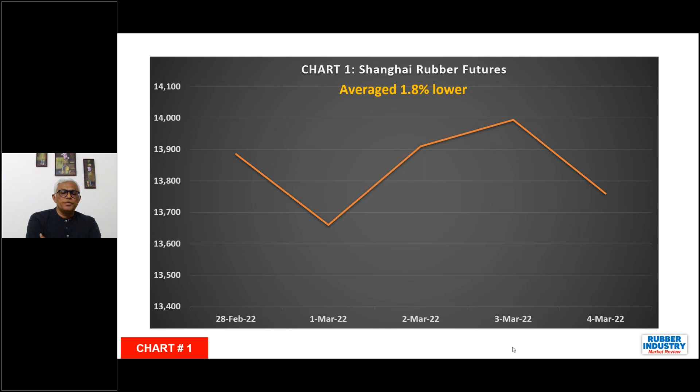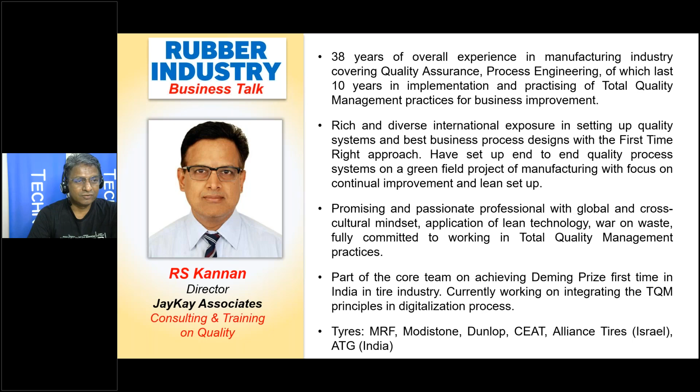He was also part of the core team that achieved the Deming Prize for the first time in India in the tire industry. He's currently working on integrating TQM principles into the digitalization process, and has experience with MRF, Modistone, Dunlop, CEAT, Alliance Tires, and ATG. So Mr. Kannan is well experienced in quality, and he'll be giving a talk on the role of quality assurance in the rubber industry for business excellence.

This will be a little longer session, so I want all of you to follow along. This is a very important topic for all rubber industries - quality, quality, quality. We talked about this in today's session with Mr. Saga Elastomer, the emphasis on quality, and looked at problems related to impurities. So let's now look at this subject of the role of quality assurance in the rubber industry for business excellence.

Welcome to Rubber Industry Business Talk, organized by Technobase. This is a Technobase event. Today we are going to discuss the role of quality assurance in the rubber industry for business excellence. I'm Kannan, Director of JayKay Associates, basically into consulting and training on quality.

When we say role of quality assurance in the rubber industry, generally people think that quality assurance is something very critical in a manufacturing setup. But my experience in the rubber and tire industry for nearly four decades has shown me a very clear indication that quality is there across the board, whether in any particular industry or even in service industry. So we are going to see how it influences the rubber industry as well.

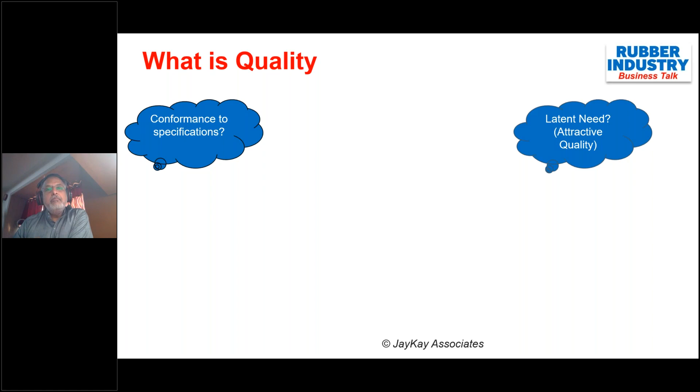So this is attractive quality. This is not one which the customer has asked for. This is a latent need. So seeing the customer going through some trouble or difficulty, you come out with your own perception of mitigating the problem, and that is called attractive quality.

Next, we are talking about ISO, that is International Organization for Standardization, which is the mother of all the standards across the globe. So what does that say? It is the ability of a set of inherent characteristics of a product, system, or process to fulfill requirements of customers and other interested parties. So is this the quality?

Next, fitness for use. There was one Mr. Juran, a quality guru who transformed Japan post World War II from a completely devastated economy to a very high level quality accepted and benchmark quality country in the whole world. He says that quality is fitness for use, which includes the issues of reliability, availability, and maintainability. So is this the quality?

We also say value for money. Now, I am a person who is actually feeling hungry and want to eat something, but I don't have more than say $10 in my pocket. So how do I do it? I can go to any nearby shop where I can take a pizza, a small burger or something like that, and satisfy my appetite with that small sum of money I have. If I have a big purse, then I can go to any proper good restaurant and splurge on having a very sumptuous lunch or dinner.

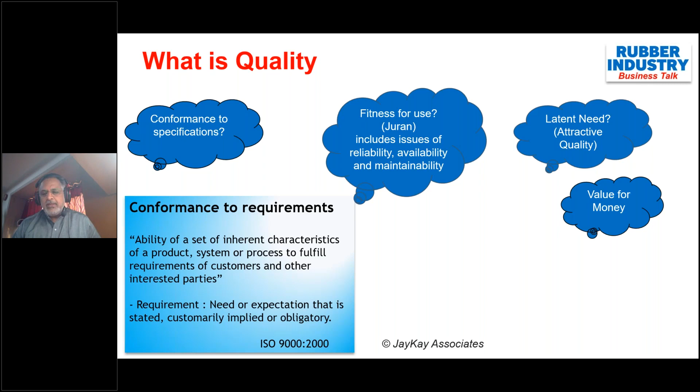So these are some of the top of the mind thoughts which come up if I have to define quality. So basically, we look at quality as a totality of features and characteristics of a product or service that bear on its ability to satisfy given needs. So now, when I have to sum up everything, what is quality? Then it is a combination of all.

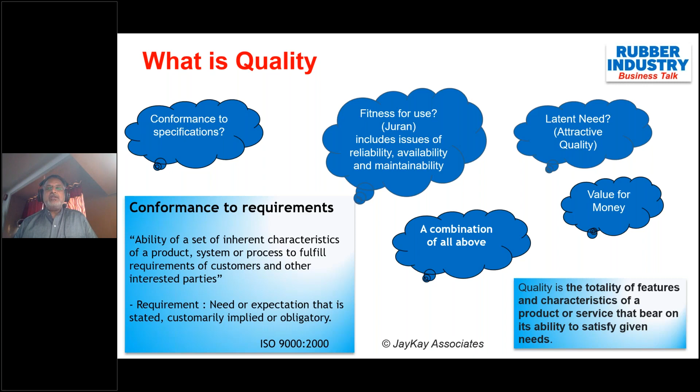So whatever we described, and there may be much more than this also. Basically, we are talking about meeting a specification, meeting a customer demand, thinking about attractive quality, latent need. We are talking about value for money, and then fitness for use, which is functional characteristics, talking about reliability, availability, and maintainability.

Now, having seen what is quality, why we need quality, what if I don't have quality, what happens? Quality is basically needed because if I want good repetitive customers coming to my doorstep, I need good quality. If the quality is not there, people nowadays don't even look at the company or the product or the service that we are offering. So good quality will make for happy customers.

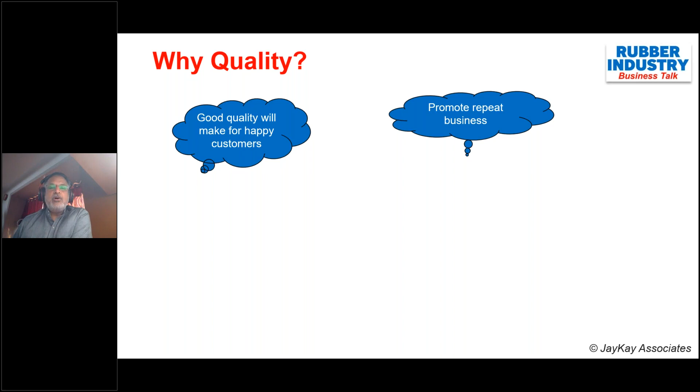Next, why we need quality? To promote repeat business. More and more new people coming also grows the business, but more important is existing customers should come back to me again and again, so that I have a repeat promotion of my existing business. So that is why I need quality.

Why do I need quality? It enhances productivity. How can quality enhance productivity? Basically what we are saying is, when the quality is very good, of a very high level, it reduces our rejections. It brings in better conformity to the variations and stable and capable processes. When this happens, automatically my rejections go down, my rework goes down, my scrap goes down. And when rework, rejection and scrap go down, it increases the output and thereby increases productivity. That is how good quality is related to higher productivity.

When higher productivity happens, then we are in a position to sell that much more to the market, and this increases the sales. So when the sales go up, automatically the profits also go up, leading to higher profit. When all these things are happening, my business is on a promotion mode, an enhancement mode, so automatically the development and growth of the business happens. When this is happening, the employees involved in the system are assured of their job for continuity and perpetuity, and this increases job security for them.

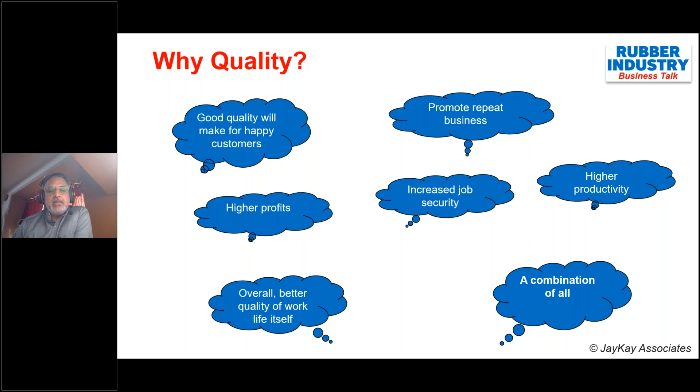Then what is it? Overall, better quality means life itself becomes comfortable. When the quality is good, your rejections are less, your fatigue and muri comes down. Automatically it increases your morale, and that's how you become a happy person internally while doing the job. So is any one of these the reason for why we should have quality? Not at all. This is again some of the few thoughts; there are these and many more which constitute the reason why we need good quality.

Again, there's a distinct difference between the perception and mindset of the customer. Customers in the early 70s, 80s, 90s, even up to the 2000s, were only worried about a product with good quality, and they were not worried about delivery or cost, because we still remember that when Maruti came into the country, when Hero Honda came into the country, we used to book a vehicle and wait 4 or 5 years to get delivery of the product at whatever cost they were telling us, because it was a supplier's market, completely controlled by the sellers. So as a customer, we had to wait and endure the time till availability was made to us.

But today, with the world opening up, economy opening up, businesses growing, there is no such situation. Today's customer says that I need completely good quality. There is no question of settling for second grade quality, and that highest quality has to come at the lowest cost and at the fastest delivery speed. So he wants a complete paradigm shift not only in quality, but also in cost as well as delivery. That is today's customer. And if you have to meet the customer's demand, then we need to enhance and ensure that our quality is always at the top level.

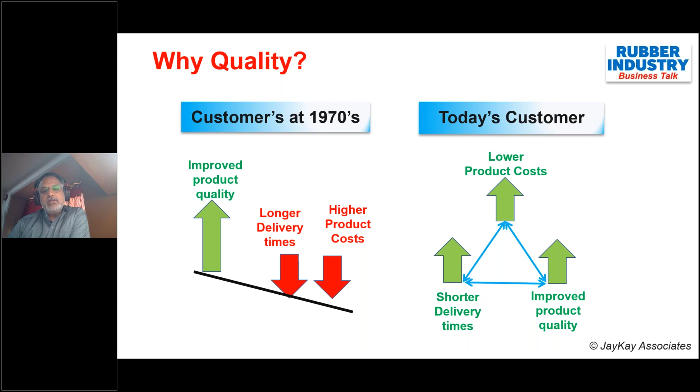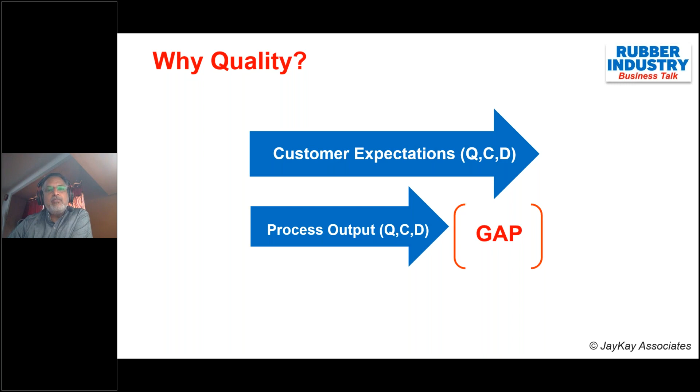When we say why quality, the customer expectations on quality, cost and delivery are given by the first arrow, whereas the process output currently is the second arrow. There is a big gap, and this gap happens because of so many reasons. We need to understand that in reality we are not really meeting customer expectations to the levels of QCD. So what is the gap, why is the gap, and what do we need to do to fill it? Let us understand why this gap is coming.

This gap is essentially coming because of variation. Variation is inevitable in any process, but we are not talking about eliminating variation, only minimizing it as much as possible so that the process becomes completely predictable and completely capable. When we bring in these two aspects into the process, we say our variations are at the lowest level, rather than high and completely unpredictable. You are able to predict and minimize the variation, thereby ensuring your product meets a definite standard of quality, much ahead of what the customer expects.

Now, when we talk about variation, we use the word process. What is a process? A process is nothing but converting an input into an output using a set of interrelated activities, primarily using resources like the 4Ms: man, machine, material, method, to achieve a desired output, inherently ensuring that we meet with effectiveness and efficiency.

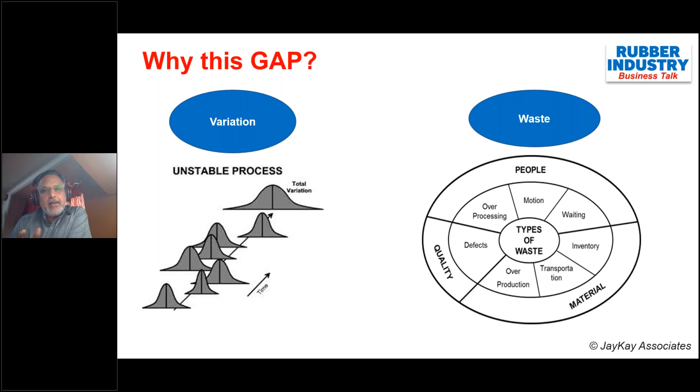The other reason the gap is coming is because of waste. When variations are high, conformity to requirements is low, and as conformity goes low, non-conformity becomes high, leading to waste. When there is waste generation in the process, it leads to rework, repair, scrap, or waste as such, and this hits both quality and productivity. Generally, waste can come from all three fronts: people, quality, and material.

So how do we look at waste? There is an acronym called TIMWOOD, which talks about the 7 types of waste. Transportation is one definite waste which we can control, identify and minimize. Inventory is another waste, where we don't have to keep storing more work-in-process material across the width. And M stands for movement or motion - when people working in a particular area move frequently left, right, up, down to fetch material to support their process, this is again a waste of time.

Waiting for the product to come, for intermediate work-in-process material to arrive, is again a waste. Overproduction and over-processing - meaning more time taken for processing or more numbers produced than needed - are both considered waste. And finally, D, the defect, which is again a direct waste in the system.

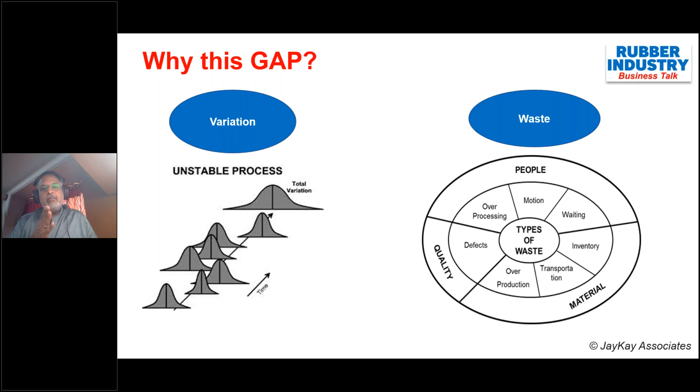So when you have huge variation in the process coupled with great waste being generated, this is sure to impact the output flow. This gap has to be completely minimized and brought as close to zero as possible, if we want to improve the perception of our product from the customer's view on QCD.

There are 4 levels of evolution of quality. As in the pre-World War II era, quality used to be predominantly inspection. So what is an inspection? Even if you see in the actual rubber industry, where rubber is taken from trees and converted into sheets and graded, it is done only on an inspection basis.

There is a standard reference given, and grading starts with RSS 1, 2, 3, 4, 5. You look at the color, the texture, compare with the given standard to see if it meets the requirement, and accordingly grade it as 1, 2, 3, 4, 5. This is the basic method of quality - when nothing is there to define what is right and wrong, you have a standard sample, and looking at the sample, you make a go/no-go or pass/fail classification, which is called inspection. This is mostly done on the final product.

If you talk about a rubber sheet, we take the latex, process it, and convert it into a rubber sheet, dry it. Post drying, when the sheet is ready, we do the sorting and classification of go no go, and then grade it from RSS 1 to RSS 5.

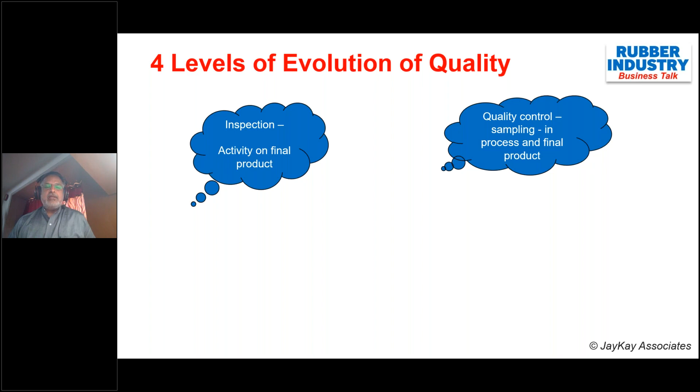Then the second stage came as quality control. Whatever we were doing at the final stage, we tried to bring into the intermediate stages, putting some kind of control aspect on the process to decide whether we can minimize and improve the rejections at the final end.

It did definitely make a big improvement, but not the improvement we are looking for, because eventually if I originally had 50% okay and 50% wrong, now it must have come to 75% okay and 25% wrong. Yet 25% is still a big rejection.

That is why both these levels of quality are called reactive, because you don't have any proactive control. You are only looking at either a finished product or an intermediate product which is developed, and then you are rejecting it. Then came the third level, with changes of time and changes in customer expectation.

We needed to go from a reactive mode to a proactive mode, and then we came out with what is called quality assurance. So when quality assurance came, the processes were getting defined, the quality system was getting defined, and the approach was based on the process approach, which is PDCA: plan, do, check and act.

Every process we do was seen from a customer angle. So everything became customer-centric, the customer became the focal point. And last but not least, it was based on continual improvement.

We will see what continual improvement is as we go down the journey, but these are the three main characteristics of the quality assurance principle, where you have to ensure a system is in place along with the process approach.

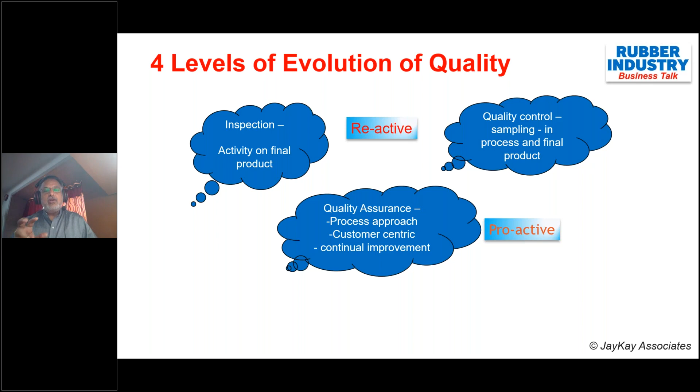So everywhere we need to ensure processes are put in place where the impact of other resources like man, machine, material, method has very little influence, and the processes take care of the entire ecosystem. That is called total quality management, which starts from end-to-end process, people, process, and customer.

So when I say people, it is hiring to firing of people. When I say process and manufacturing related activity, if it is sales, from taking a customer order to ensuring follow-up with customer service is completely in place.

When you talk about the material function, it's about identification and selection of a vendor, development of the vendor, continuously handholding him, and ensuring we become a vendor partner. So in every aspect of the processes and sub-processes, we need to ensure end-to-end quality is given high focus.

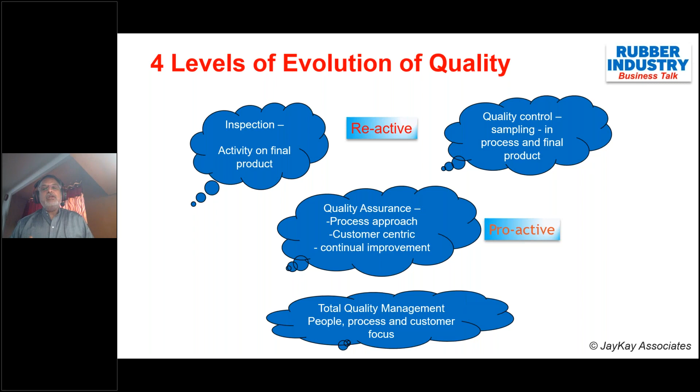Now generally, whenever this kind of situation happens, like we encounter a rejection or a process abnormality, there are two ways of reaction.

One is, you can be a proactive person, you can be a reactive person, but generally the mindset of people, or even the ecosystem, is made in such a way that we are more on a reactive process. But it is consciously made and cultivated that we need to move from a reactive to proactive process in order to win over it, over a long period of time and in a sustained way.

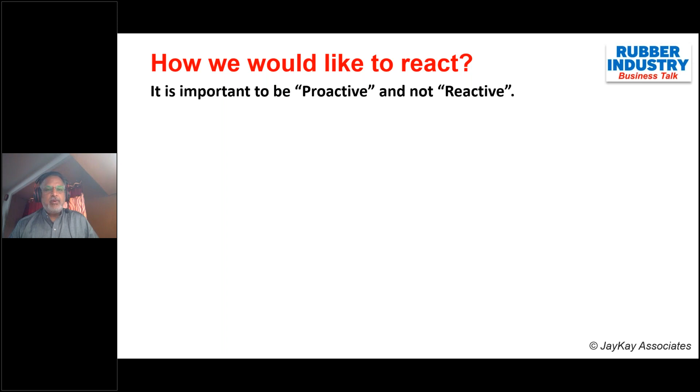So when we say this reactive to proactive, what happens? Changes are likely to happen all around us in the environment at all times, and every change brings in a new behavior. So when changes are happening around, like COVID is a change recently we had, how you make your mindset and develop processes around you to handle this is actually what makes you a person to think in a proactive way or in a reactive way. You can always lie low, cribbing, crying, but that's not going to help us in any way.

So there are three types of setups. One is a common man implementer, one is the blockers or high resistance to change kind of people, and the other one is the leaders who set a new path for the next generation to follow.

So how do these people differ? The common man implementer always thinks, when there is a change happening around creating impact, he says we'll wait and watch. We will not do any hasty action anywhere, let's wait and watch. So it not only consumes time, it also creates an impact on our working process in the form of business excellence, output, or profitability.

Next, there's little anxiety, then some reactive state. I'm not really going into finding what exactly went wrong or how I can defeat it or overcome it, that kind of thought process is not given. I straight away jump into a reactive process with anxiety, and because of anxiousness this is resistance to change, because I don't want to make a change around me immediately, as I am fearing any changes that I'm likely to comprehend or contemplate.

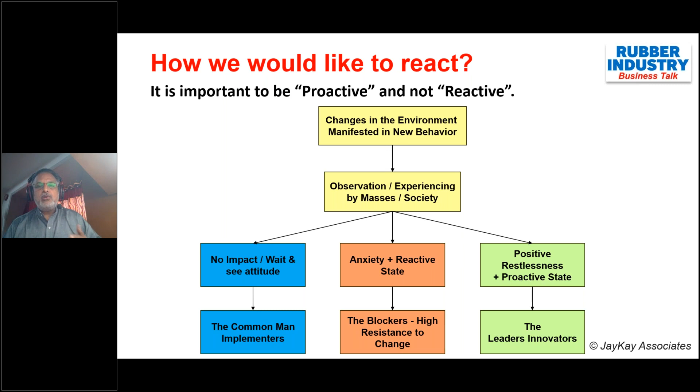Now, when you say all these things, can we avoid a change? Changes cannot be avoided. Changes are an integral part of life. Changes are everywhere. Now, even for a plantation, even for a rubber industry, there are certain elements of weather condition which are very, very critical for growing rubber.

There are certain levels of rain that are expected. In case of the tire industry, if any of these things backfire and the production of rubber falls down, then it's going to create a lot of uncertainty in the availability of rubber, and the demand-supply ecosystem completely changes.

Now, can we avoid this? You cannot avoid a change, because changes are going to be permanent in life in some form or other. So what kind of changes are we talking about?

It is basically recognition of a new paradigm, or even questioning the existing paradigm within us. Are we on the right track, or what was decided 5 years back, 2 years back, 1 year back, may not be applicable for the current day and for tomorrow. So do we need to introspect and do something different?

Then we have to create a vision, based on the fact that what we did till today will not take us forward for the next 5 years, because what we did brought us till today. Now, if you want to go ahead, we have to think differently. So you need a completely good visioning process, and that comes with looking at the environment, looking at the challenges around, looking at our own internal process systems, and how good and how bad we are.

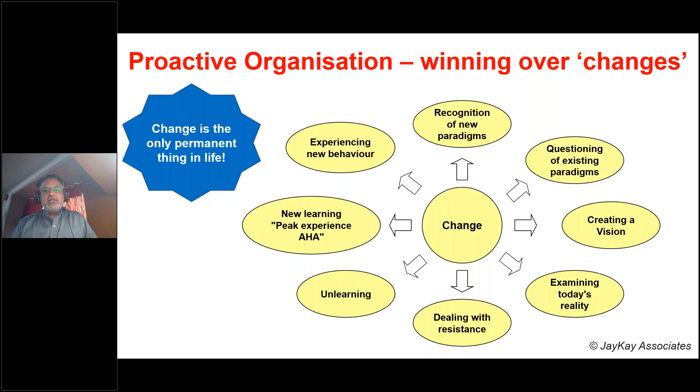So when I say come out successful, managing the change, how do we manage a change? There is Dr. Mary Lippitt's method, which is universally available and people understand it. There are 6 pillars leading into the process of handling change: objectives and goals, robust methodology, structure and resources, skills, inspiration and motivation, and action plan. Ideally, when all 6 are in place, it leads you to breakthrough results.

But are we having this at all times? Many times there is no immediate objective or goals or vision set. We are in a problem, we see a change hitting us, so we have to change. So immediately you talk about robust methodology, structure, skills, inspiration, motivation, action plan, but there is no objective. That leads to confusion. You don't know where you're really traveling to. If you don't have a robust methodology, whereas you have everything else, that leads to incremental benefits.

Because the methodology is not very robust, it can give you some immediate gains, but it may not take you further. If you have all other things but no structure and resource, it will lead to frustration, because people will feel they are not supported to encounter and handle the change. If you have everything but no skills - and skills are very important in managing a change - if that is not there, there is a lot of anxiety: what is going to come out, how am I going to meet it, how am I going to do it.

Again, you have everything but there is no inspiration and motivation, then it leads to slow progress, because people always need a kind of pat on the back for handling every situation, and if that is not there, it leads to slow progress. You have all five but there is no action plan, then you are actually in a false start - you are not even starting, you are only talking but no action happening.

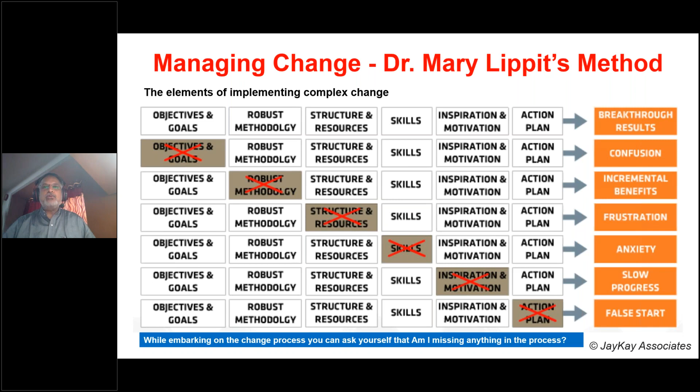Now, when we say all these things, coming back to the topic started with quality assurance and business excellence, how quality assurance impacts business excellence - a business is done to create money, and create money in an ethical way, in a legalized way, in a very structured manner, without impacting the society, without impacting anybody, while at the same time being a contributor to the society.

So business is done to make a profit. Business is done to make growth, because what your business startup is today, you want to see this growing manifold times, and you want to create a business for perpetuity, not only for you, but maybe generations of people after you come and take the business up. And when you do the business, it has to create a good image - building image is as important in doing business as creating the business itself.

When you say business is meant to make profit, how do you define profit? Profit is defined as the universal thumb rule: there is a price to anything, and then there is a cost of manufacturing. Price minus cost is profit. When you do this, who controls the profit, who controls the price, who controls the cost? Are all these things controlled by one?

If yes, then how it is handled? If no, then how it is to be looked at?

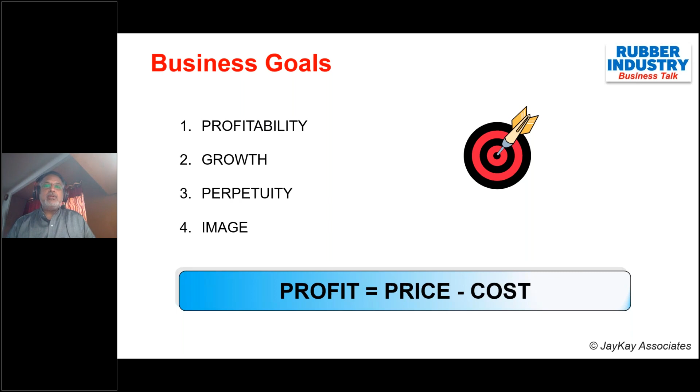So when you look at the concerns, any for a manufacturing person, wherever it is, whichever be the product—be it a hardcore rubber which is being manufactured, or a synthetic rubber, or any rubber product like o-rings, or even a tire—there are two sets of people: one is a manufacturer, one is a customer.

For the manufacturer, whatever he makes has to have a quality. Whatever he has made, it has to have a cost attached to that, and then the productivity should go up. If the productivity is very high, and if the cost is optimal with good quality, then he will be able to give a better product and operate the business at a better level.

What does a customer look at? He wants quality, but he wants the lowest price. So if your company as a manufacturer says, I'm going to spend $100 for making a product, the customer will say that I'm not willing to give you more than $50. So he looks at the price very differently from what a manufacturer is looking at.

And when you talk about productivity, the manufacturer says I will make so much productivity and keep it, but the customer says I don't care about your productivity, I need availability. Distribution and service are very important. I need to get an item at a time when I want, at a place when I want, at a cost when I want, at a quality I want. That is today's customer's need.

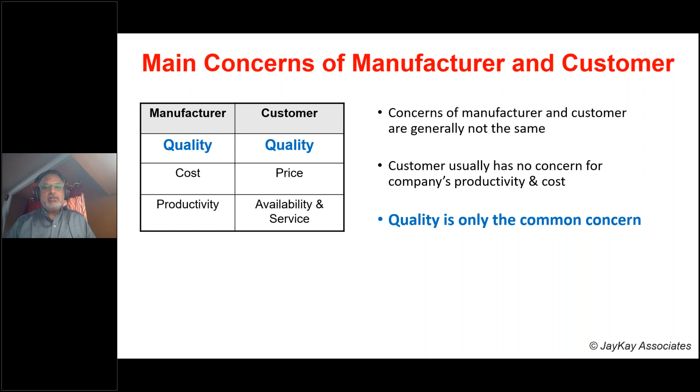So how do we work on this, and how do we enhance quality at a low cost? So understanding the cost structure a little better, because when we talk about quality playing a role in business excellence, we need to have a connection between the two.

So when you look first, there are three cases: cost plus profit equals price, which is the status quo. Second is price minus cost equals profit, which is subtraction principle number one. And price minus profit equals cost is subtraction principle two.

So what do I mean? When I'm talking about cost, price is not controlled by me—it's controlled by the supplier and the environment. Like today, when oil prices go up, there is no direct connection between natural rubber and crude oil. However, when crude oil prices go up, the cost of natural rubber also gets impacted.

Why? When crude oil goes up, all the derivatives of crude oil, like synthetic rubber production, don't sell well because of the higher cost. When synthetic rubber sales take a hit, producers automatically move to production of natural rubber, so the impact comes onto natural rubber. So what direct relation is there between natural rubber and crude oil? There is nothing—it's an indirect impact, because natural rubber and synthetic rubber together constitute the making of a rubber product, be it a tire or any other rubber product.

So it is very important—cost price, when you look at it, is not within our control; it's at the control of a third party like a supplier or the environment. There we will have no say.

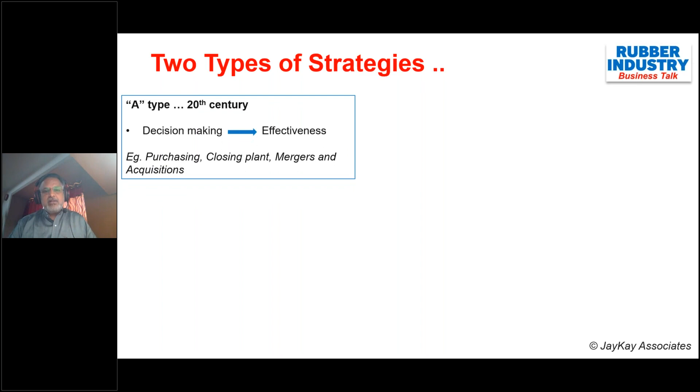So how do we do this? Now we saw all these things that we need to do. Now how do we make things happen the way we're thinking, to enhance the quality so that we have a good business. There are two types of general business strategies. One is A type, which is American type. The other is J type, which is Japanese type.

While American type always thinks of the metrics and the outcome deliverables, the J type thinks of the ones making the business, which are the processes. So in the 20th century, when you look at decision making, like purchasing, closing plant, mergers, acquisitions, whatever we talk about, leading to effectiveness and scaling up of the business, that was a typical American type.

While in Japanese type, it was decision making with a company-wide effort, meaning 100% total people involvement, employee involvement, leading to effectiveness. So basically you have to talk about improvement of quality, bringing it to world class level, and completely minimizing the rejections and defects.

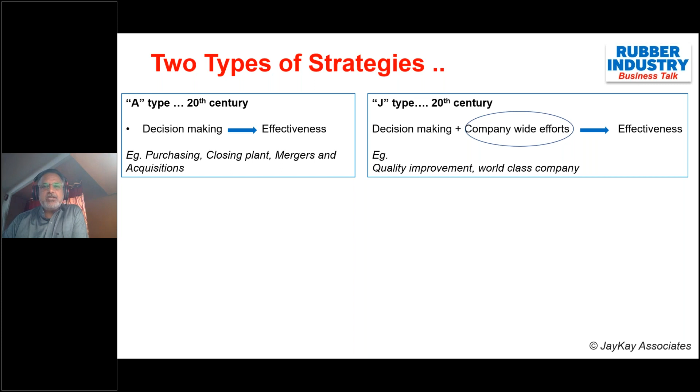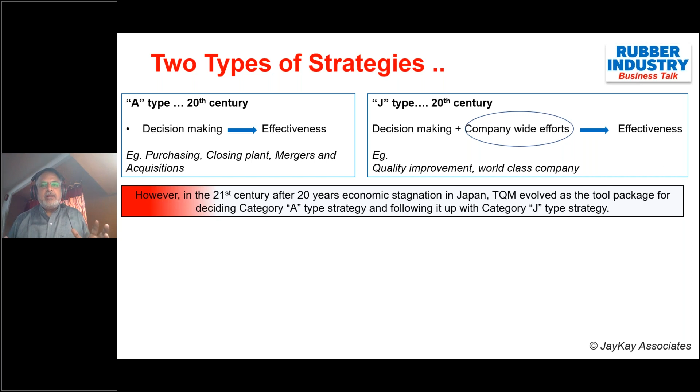So when you do this, they found that in the 21st century, the better way to look at it is: American type has a purpose in mind of business enhancement, and Japanese type has methods deployed to create and achieve that. So it should be a combo of both, mixing American type with Japanese type input, so that we get the best of both synergies. That's how businesses got tuned.

So while in American type, you looked at acceptance quality level as one of the main concerns for a process, in Japanese type, they looked at defect levels instead. Once the defect levels are brought to almost zero, automatically the quality level goes up. And the defect level will come to zero once you avoid variations and create more stable and capable processes. When that improves, automatically your quality level also improves.

So the basic perception was looking at the metrics. We were looking earlier at percentage as a key benchmarking parameter, but today we no longer look at percentage. We start looking at ppm, parts per million, parts per billion, and so on, so that when your focus is on a broader canvas and you work on a certain level of defect levels, it automatically enhances the process quality level.

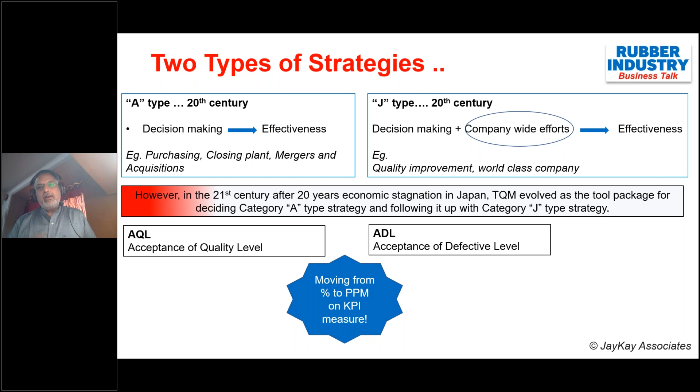Now these are all basically done covering total quality management. Total quality management is one tool, like I said earlier. It is an end-to-end tool where we are not talking about a product or service per se. We are talking about totally focusing on the processes that we deploy in order to achieve this complete end-to-end quality.

The objective is to become the lowest cost manufacturer and highest quality supplier, then satisfy and even delight the customer. When I say customer, I mean all stakeholders: the customer, the shareholder, the employees, and society. We are answerable and responsible to society around us, and to the overall environment, taking care of emissions, pollutions, and all those aspects.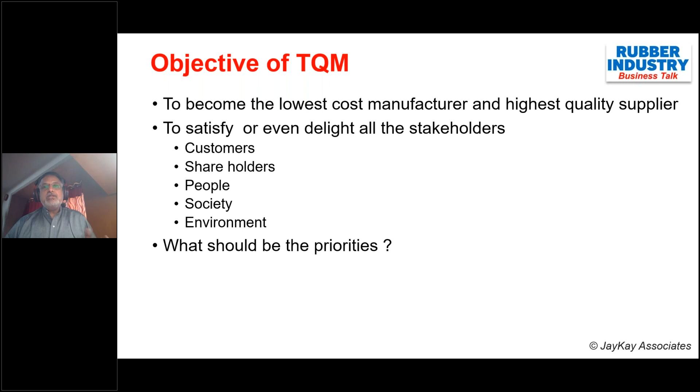So what should be the priorities? How do we set the priority? We have seen that whenever we talk about operations, there are a lot of challenges. So let's look at some of them and identify whether we have these kinds of things in our organization too.

What are the symptoms we are talking about? The first symptom is a high incidence of abnormalities. What is an abnormality? I have a requirement, a specification, and a reality, the actual outcome, and when both don't meet each other, that leaves a big gap, which is called an abnormality. So is my incidence of abnormality very high? What's the other one?

High rejection. Because of high abnormality, my rejections and rework are very high, leading to more rework, repair, and sometimes scrap, generating a lot of waste. Rework is also non-value added work, an NVA coming into the process. It leads to higher scrap, and when rejections, rework, and scrap go high, automatically the yield reduces and the straight pass through gets reduced.

So we are not able to meet the desired productivity or efficiencies. We face lower efficiencies and lower productivity. And when so many complaints, defects, and abnormalities are seen inside the premises, there will obviously be some spillover going to the customer, which comes back as high customer complaints and rejections.

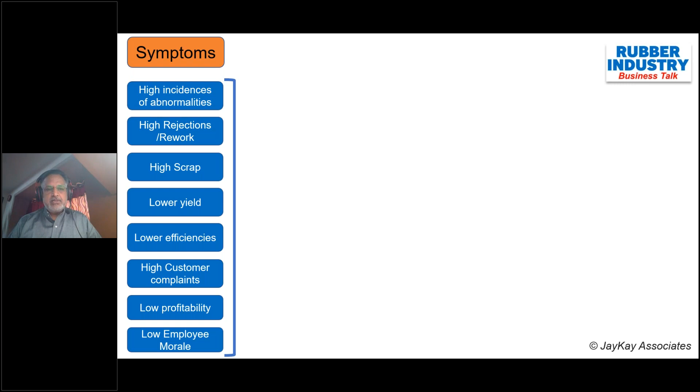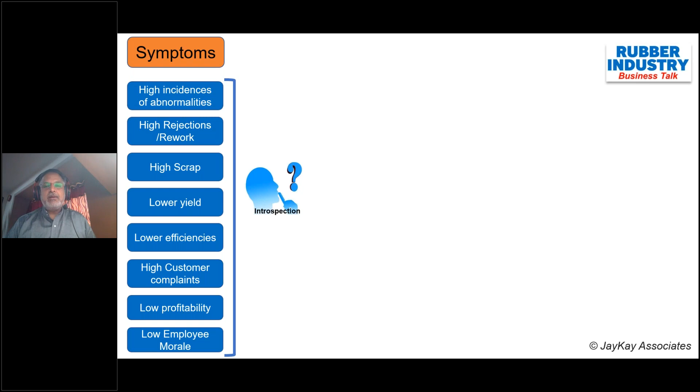When such things happen, the first thing we should do is self introspection. Are we seeing one, many, or all of the identified symptoms here? The first question that comes to mind is, are the systems in place? Do we have adequate systems to take care of all these symptoms?

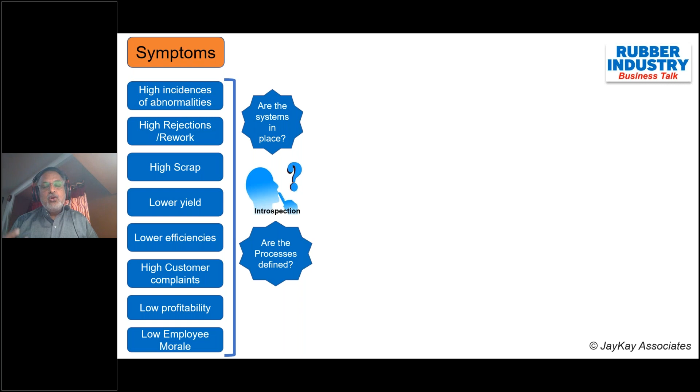If we have systems in place, the next question is, are the processes defined? Do we have a defined process to take care of these symptoms and prevent them from happening in the future? And last but not least, we also think about whether we are a reactive or a proactive person.

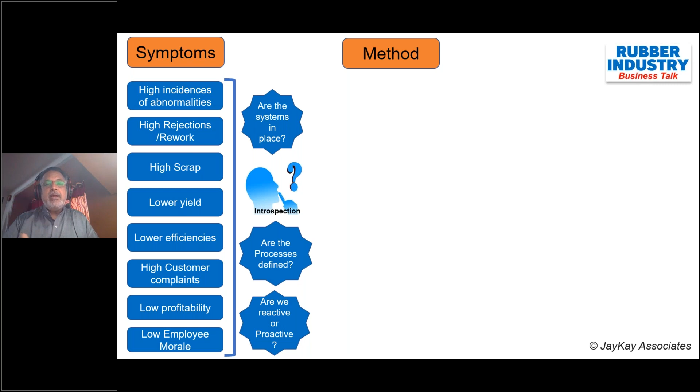If you look back at managing the change process, are we in a reactive mode or a proactive mode? If you are proactive, we won't get into anxiety; instead, we understand the process and design accordingly to mitigate, overcome, and excel. But if you are reactive, the anxiety itself creates more trouble, and problems only multiply.

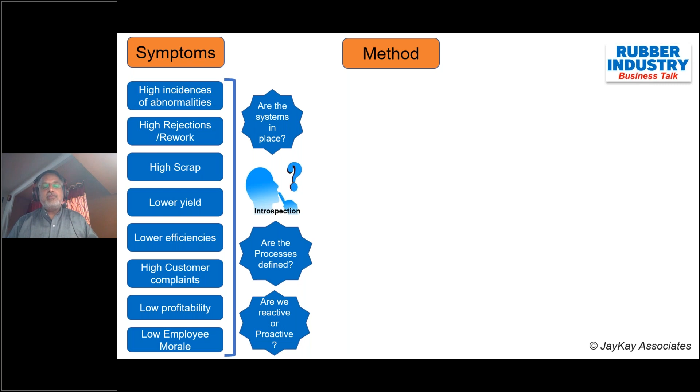So how do we take care of all these things? Some of the methods we use start with a first time right approach in the end-to-end process.

Any process that we design, anything that we do, let us consciously adopt a method of first time right. What is the meaning of first time right? It means anything that I do, I will do it with the intention of having 100% yield and 0% rejection. Is it possible to have 0% rejection? Absolutely not. That is why even at a Six Sigma level, we say 3.4 DPMO, we don't say 0 DPMO.

So when you say 3.4, that means there is some amount of defects which are going to be there. That's why I used the word variation cannot be eliminated, it can only be minimized. So what we are saying is, any process that is designed, let us design it in such a way that the approach we give is first time right.

Let us reflect on this in the rubber industry. If you typically go into any rubber industry, people making hoses, o-rings, rubber mats, rubber pads, they are mostly not a very high-end manufacturing setup, mid-level or start level. So they will be having a lot of resource challenges. More the resource challenges, they will end up with more rework or incidences of abnormalities or rejections, which is definitely going to impact them on quality.

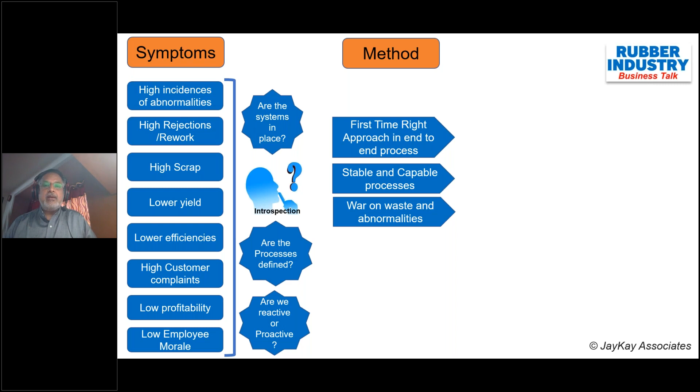Because we are working on reduction of abnormality, rework, and scrap, and enhancement of quality is done, automatically my customer complaint reduces. And when customer complaint reduces, the customer wants to engage with the company again and again repeatedly. When this kind of repeat business happens, automatically the company profits also go up, and it leads to very good high consistent quality in the product, high consistent productivity in the process, high consistent delivery to the customer. When all these three are in place, it automatically leads to customer delight.

So what is customer delight? Customer delight is one where the customer gets what he wants, and he also gets what he has not asked for. So you are giving him a latent need of customer, which is attractive quality also you are giving him, so he is already delighted.

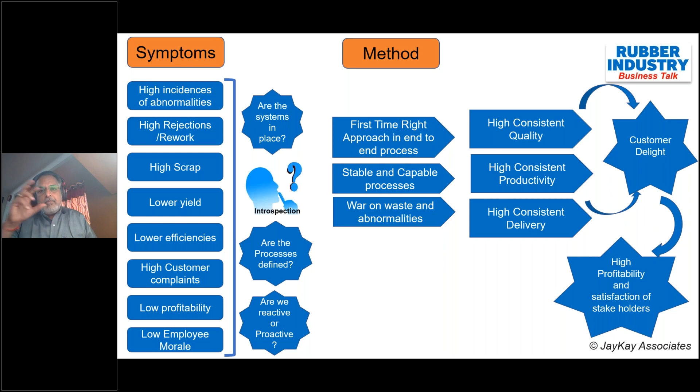When a customer is delighted, that leads to high profitability and satisfaction of all the stakeholders. Because when the money circulation in a business is unhindered and goes in a free flow, then all the stakeholders also start becoming more and more happy.

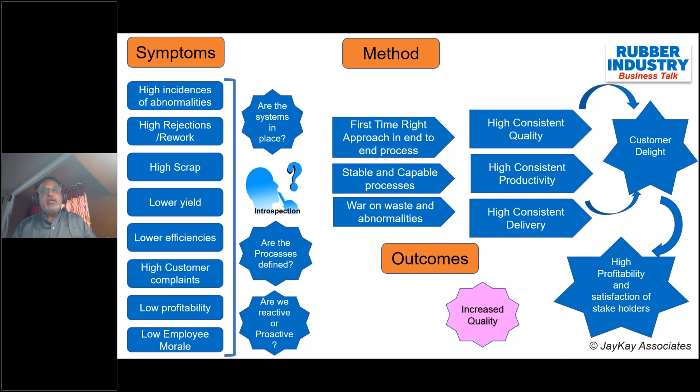So what is the final outcome of all these things? Whenever you have this kind of a situation, first thing is you see that the quality we are talking about is completely enhanced, and a high quality product you are getting. And the second thing you see is whatever you are giving, you are able to give it at a reduced cost.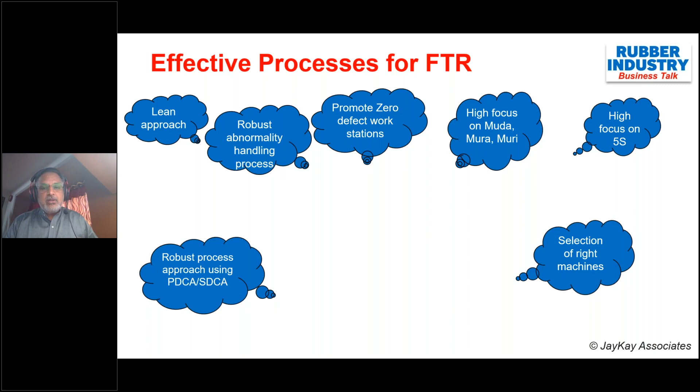So what we saw as TIMWOOD, those things can be addressed by minimizing inventory, movement, everything. So the lean approach helps us in doing that. 100% people involvement will ensure the right skill is developed and deployed. Deployment of TQM as a practice ensures end-to-end quality is focused. It's also VSM, value stream mapping, which is part of the lean approach, understanding the balancing of the process and accordingly setting up the process.

So use of digital. Now the industry is moving from 1, 2, 3 to Industry 4.0, where everything is more focused on digitalization. So how can we bring digitalization into our process, which will minimize our efforts, minimize our variations, and increase our predictability? Because there is usage of artificial intelligence, machine learning, and the internet of things. So all these things are available.

So data analytics becomes very, very important. How do we enhance quality using the right data analytics, AI, ML, and IoT, which is part of Industry 4.0? When we do all these things, we are actually trying to build quality in the process, enhance and enrich the process itself. When you have all these things in place with a BQIP focus, automatically as a combination of all, we are headed in the direction of setting up the first time right process in our system.

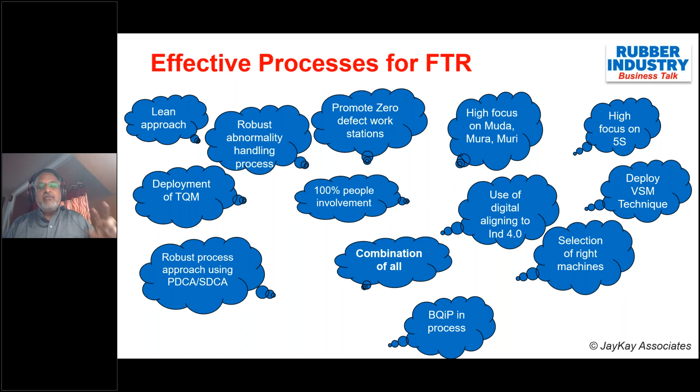Now when we talk about first time right, it has to be coupled with some quality systems. Quality systems have 4-5 levels of maturity. Level 1 is the initial one, where there are basic QA activities, ad hoc, poorly arranged testing - some there, some not there, kind of a thing.

Then the managed situation is like, at level 1 you are in an inspection mode, now you are coming to some quality control mode. There are some activities planned and documented, testing procedures are there, but you don't have a quality process or practice in place. Then you go to level 3, defined, where you have an established quality assurance system. You create SOPs, work instructions, skill matrices, and see how the process has to be deployed. You create training need identification for people, train all people in various aspects of their weak points, and ensure you support them to get to a high skill level to meet the entire process.

Then it goes to a matured and measured one, where you start having measurement of everything. You can use artificial intelligence, have HMIs, human machine interfaces. Then you can collect the data, analyze the data. SCADAs can be used, then data analytics can be improved. With all these things, you are in a position to use AI ML processes to better qualify and make the processes more robust.

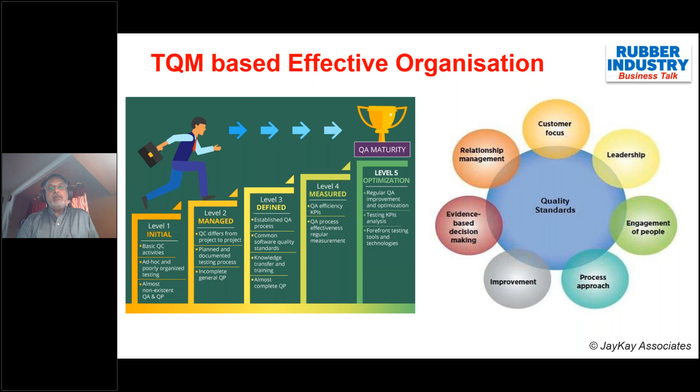Then improvement - we will be seeing what improvement is, I'll tell you. There are two types of improvement: continuous and continual. And evidence-based decision making - always you should talk with data-based and fact-based decisions, not perception-based decisions. Then relationship management, enhancing the relationship between us and the supplier, us and the customer, us and the stakeholders like investors and employees. So building up a good relationship. All these together build up and improve the level of your quality assurance from level 1 to level 5.

We are going to see what quality first means - basically, adopt a quality first principle, which means you improve the design excellence, where the cost is initially seen more for the design build-up. But when conformities go up, when compliance is improved, it reduces abnormalities, thereby leading to fewer errors, then it reduces rework, reconciliation, and inspection, and it turns into high productivity.

This higher productivity directly implies that your actual cost loaded on the product reduces in the subsequent operations, and it gives you better efficiency. This enables you to reduce your price to the customer, because whatever factored price variations because of the processes you are going to incur has come down. This can be passed on to the customer by reducing the prices.

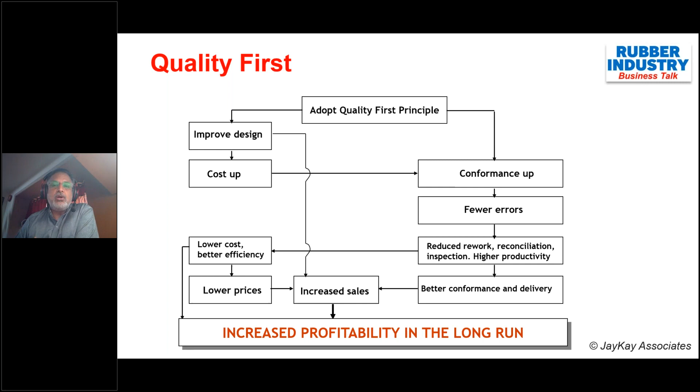When you reduce the price and give it to the customer with good quality, it increases the sales. As the sales increase, the profitability increases in the longer run. You should always look at the long term and not only the short term for any activity. That is a fundamental focus of TQM.

Now next we go to working with facts and data. Data is very important and facts are important. So when I say I'm feeling cold, it is just an opinion. When I say a temperature of 15 degrees is making me feel cold, it is a fact, because I'm supporting it with the data of 15 degrees.

So like that, for every process, instead of talking in thin air or in an abstract way, we should try to fetch the data for each and every process output. Once the data is there, analyze it, work with the data and work with the facts, so that you are able to take an informed decision, and we can come out with the correct proactive processes for the future.

So in the Japanese method, this is called 3G, which is Gemba, Genbutsu, and Genjitsu. And the Indian translation is 3R's, which is the real workplace, real object, and the real fact. Anything, whenever you are seeing a problem, go to Gemba, go to the work spot, the main place where it is happening. It will tell you a different picture.

Just to give a crime serial example, when any crime is being investigated, they don't work only with whatever evidences are thrown and shown by people. They go to the crime spot, cordon it off, and then look for evidences. So that is what we are trying to do in the process also.

Whether it is my rubber yield that is less, or my rubber product yield, or my tire product yield that is less, I need to first go to the point of operation, which is Gemba, look at the observation and get the data, observe the facts, then properly understand the real fact behind it. And from there you go to the root cause analysis, and there are many tools which support and improve the system on this.

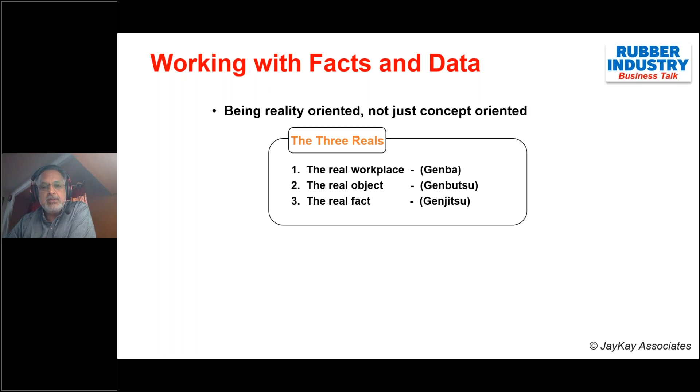Similarly, when we are talking about 3R, we should also clearly look at the 3 M's. In Japanese language, 3 M's means Muda, Muri, and Mura. These are all integral to every manufacturing or production activity. It is also applicable to service activities. When we talk about Muda, Muri, it is there.

Even if you go to the rubber plantation estate, you will see all three happening. If you go to a shop floor of any rubber product manufacturing company like O-ring or rubber sheet, you will see all the 3M. You go to the tire industry, you can see all three. For that matter, you go to any industry which is of manufacturing type, you will see Muda, Muri, Mura very much in place. It is only our awareness to understand and identify them to work on, which is very, very important.

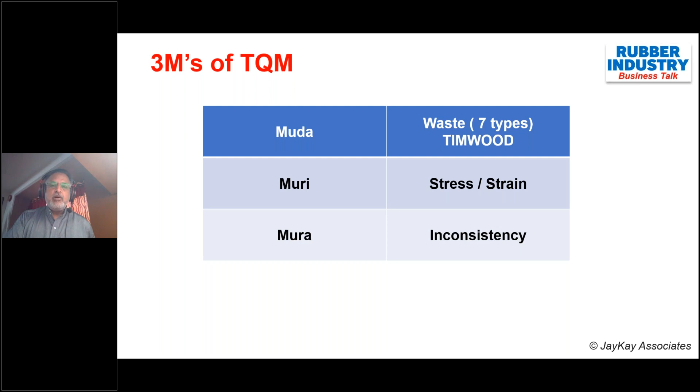That's why focus is given on the 3R's and the 3M's. Muda is the 7 wastes, which is TIMWOOD, an acronym. Muri is a stress or strain on the process or on the people. Mura is total inconsistency. So when we take care of the 3R, 3M and basic abnormalities, and talk about the quality systems in place, then we are actually going into the right frame of setting up a quality system, with continuous and continual improvement.

There is a typical example I can give. Continuous improvement is you keep improving, so that when the person changes or the situation changes, whatever was improved may not stay there, it may roll back and come back to the start point. Whereas with continual improvement, you start at a place and then probably go one line of improvement, then go to the next improvement process, and after improving the process, whatever changes you did, you actually stabilize and standardize the whole thing.

So this is the start of the process. I'm now going to PDCA cycle, which is an improvement. After doing the PDCA, validating the change, validating the improvement process, I now say this has gone from a level here to a level there.

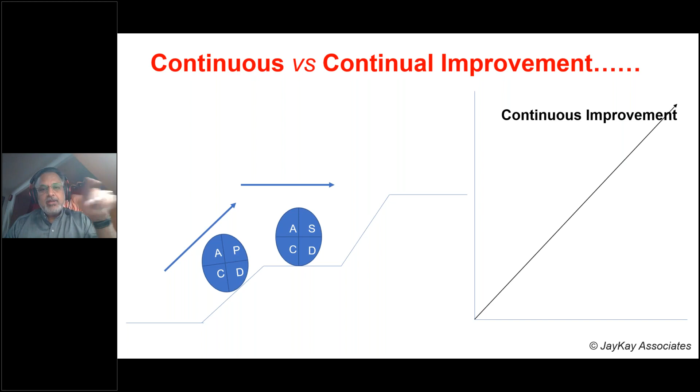Now I have to standardize that process and sustain it. So when I do an SDCA, standardizing the changes and then looking on the operations, do, check and act, I see that it is able to hold on for a considerable period of time. Now, what is the time, we can decide independently depending upon the company and operation.

So once this is standardized and validated, now I go to the next level of improvement again with the second cycle of PDCA, and then again to SDCA. So like this, I rotate my PDCA, SDCA, PDCA, SDCA one after the other, multiple levels, as it is there in a process.

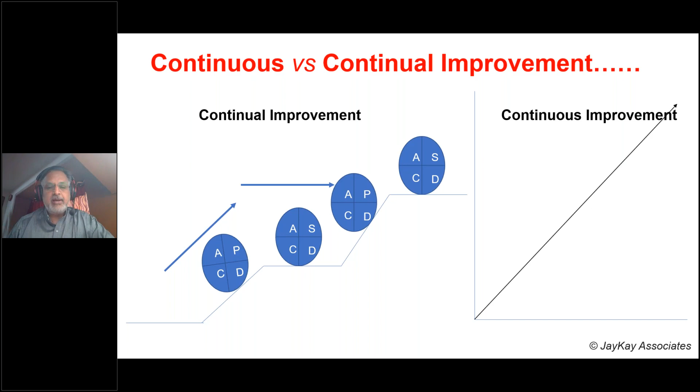Then this activity is called continual improvement, and this continual improvement will always enhance the product quality, process quality, or service quality from one level to some hundreds of notches higher as the process of continual improvement goes on. So finally, to sum up things, we are saying that a successful company with huge profit...

When you say you have a robust QA system, you have a culture of PDCA, SDCA, RCA, which is root cause analysis. You have a clear focus on the 3M's - Muda, Mura, Muri - and 3R's, which are real object, real place, and real evidences.

And then you have a customer centric and focused approach, because the customer is very, very important in any business. And if you don't satisfy the customer, then your repeat business is not going to be there.

And we don't want to do anything dependent on 1 or 2 or 3 people, because if those people go out of the system, it should not collapse the system. So the standard has to be that 100% employee involvement has to be there, creating a process so robust, training everyone to meet the challenges.

And the attitude or culture of the organization has to be continuously focused on continual improvement. You improve, stabilize, improve, stabilize, improve, stabilize.

So when you have this kind of system in place with a focus on abnormality, focus on reducing variation, focus on PDCA, SDCA, focus on RCA, and focus on the 3M, 3R, and mainly the customer, supported by a good company vision, management vision, mission and objectives, and with 100% employee involvement, what happens is we see the business growing manifold times. The excellence of the business goes from one level to manifold times better, and this increases the profitability of the organization.

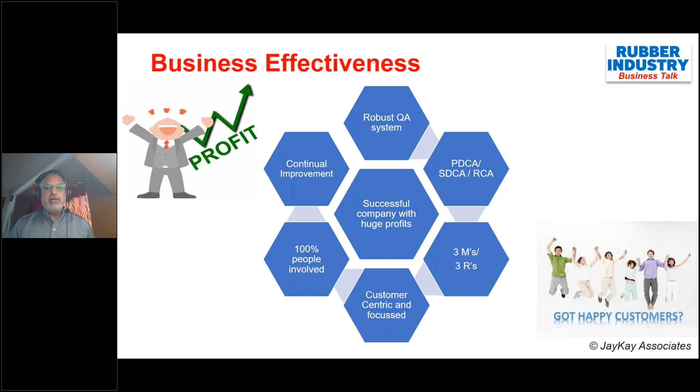When the profitability of the organization improves and the company is in a very good healthy position, it reflects in a happy customer kind of feel. So when the customer is happy, we are all happy, all the stakeholders are happy, and our morale is very high. So finally it ends up saying that QA, which is integral to every business, enhances the business excellence with all these inputs going together from different sources and different viewpoints. So that leads us to happy customers.

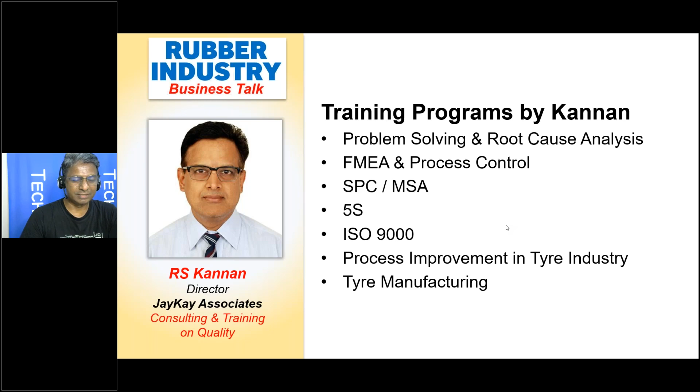That's about the rubber industry business talk, focusing on the role of quality assurance in the rubber industry for business excellence. So guys, today is a long day - this session is probably the longest Rubber Industry Business Talk so far, but we have addressed very important issues relevant to the industry. I'm thankful to all the participants and all the speakers joining the session today.